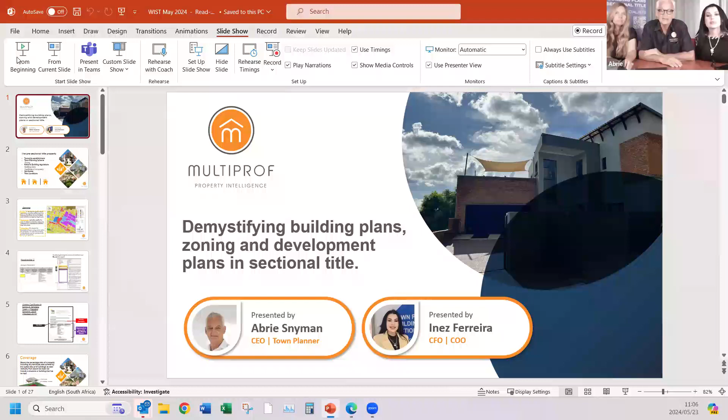Thank you very much, Marina. Thank you for the opportunity. It is always nice to share what we are passionate about. This part of sectional title has long been neglected, and today we are suffering the results of these parts of complexes not being adhered to. It's a very short period to discuss everything, but we're just going to touch on the basics.

Can you see the presentation? Yes, I can, can you see it? Okay, so let's start at the very beginning, and I think that's where a few things go wrong in understanding how sectional title fits into the general scheme of things.

Let's look at the pre-sectional title property. Each and every sectional title property complex, duet, whatever, before it became sectional title, was just a normal stand in a township. The township was established, and while it was established, municipality and private sector got together and a plan was put together that we call a zoning plan. Basically, that would indicate the use of a property - what type of activity, and very importantly, how much of that activity. This formed the foundation for any future use of the property, and it then reflects on a sectional title complex or any sectional title development erected on a zoned property.

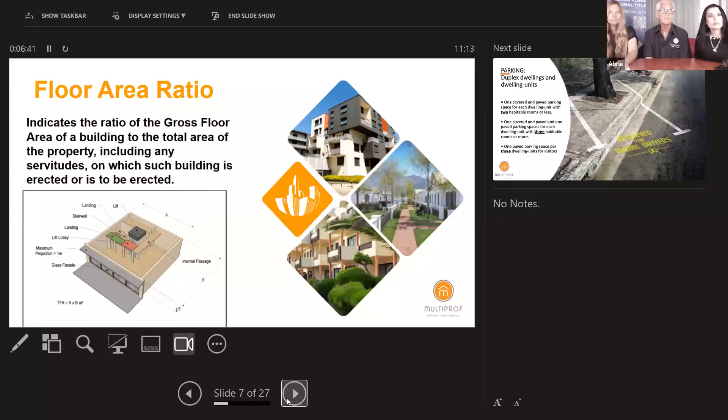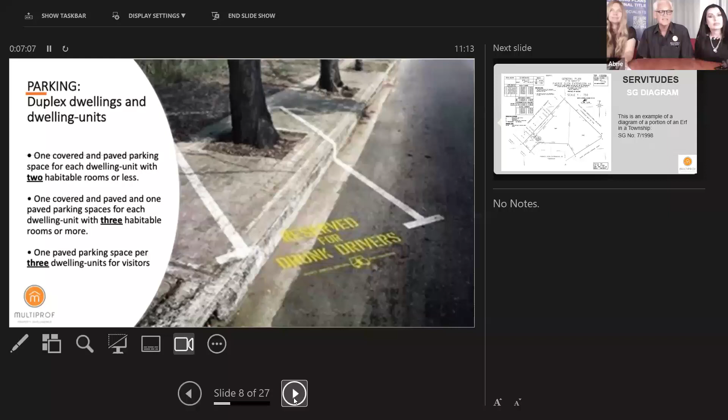Then there's an aspect we spoke about a lot in general, and that's parking requirements. Parking requirements are linked to the property, and we cannot decide we really don't need this parking, or convert the parking that is legally supplied into other uses. That is on the property even before sectional title was involved.

Then another aspect that is linked to the property is servitudes. Often in complexes, people are not aware of it, and structures are erected on them, which becomes a big problem.

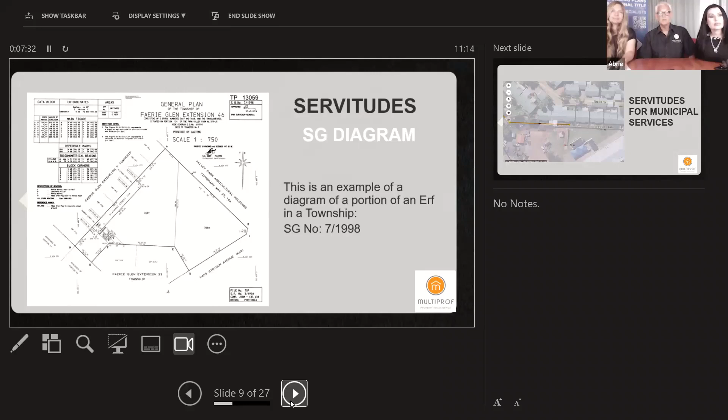Then restrictive title conditions, which I think you know more about than we do. The title conditions come with the property, and in this case it would say no structures of iron or wood can be erected. Now, what is a Wendy house constructed of? What is a carport constructed of?

It creates huge problems trying to get plans approved for these additions that were done without following the procedures, and it can be hugely expensive, as you will know, to remove these restrictive conditions, and it takes time.

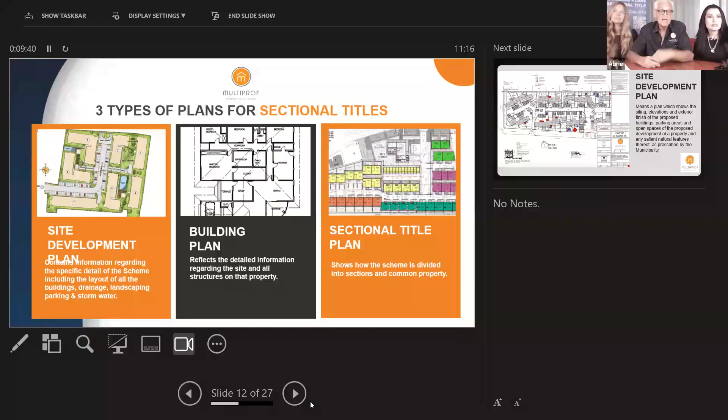Now, a site development plan, as we would have seen from the zoning certificate, is a plan that is required by the zoning. It would say the start of everything is a site development plan, meaning a plan which shows the siting, the elevations, the exterior finishes, the amount of parking, the open spaces, entrances and exits. So that forms the basis without the details of any development, and it's not to be confused with a site plan.

With building plans, you'll find the site plan just indicating the position of it for practical purposes. But this is a legal document, and every time a change is made in a complex, this site development plan must be updated. It is not in all cases relevant - in some municipalities they are not strict on it, or they don't ask for it. It depends on whether you're adding to coverage, like shade netting, which they wouldn't ask for because it doesn't affect the coverage.

So in some cases, it depends on what it is that you are amending on site. If it is like shade netting, that is not seen as a roofed structure, so it's not part of your coverage. Council won't need you to update the site development plan. Thank you very much, Inez.

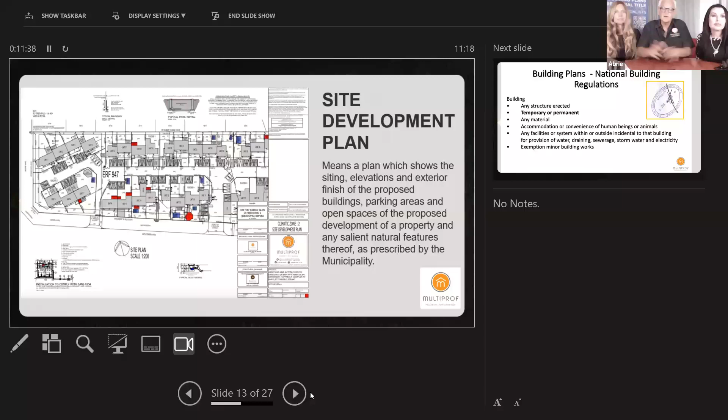Okay, so that's the site development plan. The next plan is the building plan, and that is also Inez's speciality, so she can just take us quickly through some of the basics of building plans according to the national building regulations.

The law states that each owner needs to have a copy of their approved building plan for all structures on site, including a linked certificate of occupancy. So there's two phases: there's your building plan whereby you approve all structures on the property.

People have this misconception that certain structures are seen as temporary - these are normally lapa's or Wendy houses. They definitely have to be on a building plan. If you are on the property, every structure that you can see, even a water fountain, needs to be on your building plan. There's no such thing as a temporary structure. There is such a thing as minor building works, but it does not exempt you from submitting a building plan.

So this is all for your safety. Due to the fact that you can put anything on a building plan and have anything approved as long as it is according to the national building regulations, council requires that you get a linked certificate of occupancy.

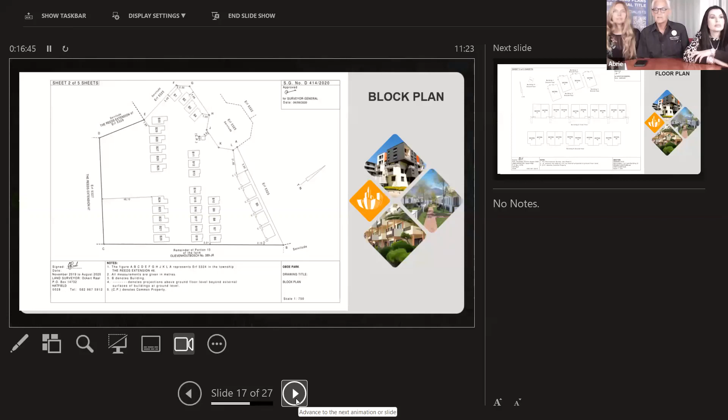As we all know, we're all fairly familiar with sectional title plans. They consist of a few different pages. The first one is basically a block plan indicating the position of the units, with no dimensions really, except some dimensions to the boundary line. Sometimes the servitude will be on there.

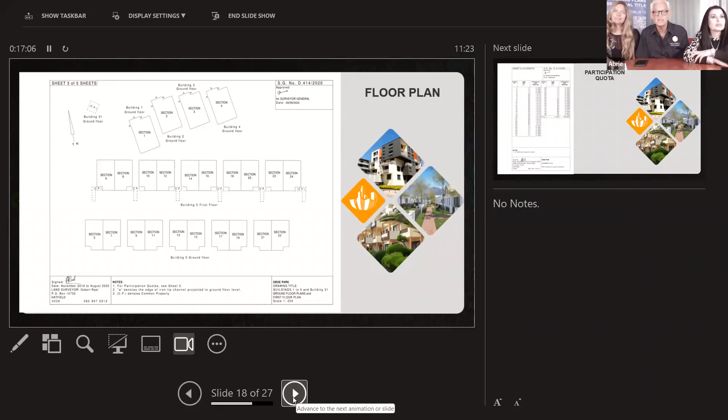The page most important for property practitioners is the specific section. Basically what each owner owns is the inside of that section, and then an undivided share in the common property. And very importantly, something that was neglected for long, is the participation quota that is derived from the floor area that is registered.

Of course, if this is not kept up to date, the square meterage of each unit, then the PQs are not correct, and the levies charged according to the PQs are not correct. The implication of that is that some owners are subsidizing other owners because they are not paying their correct PQ amount levy.

The implication of that is, of course, that you cannot lay claim on any of the common property for your own purposes. That's what happens if you erect a structure on common property and use it for your own purpose, or if you use your garage for storage and then say you're going to park your car in front of the garage, because the area you're going to park it does not belong to you. It belongs to everybody in an undivided share, and you cannot prevent another person from having the use and enjoyment of that common property.